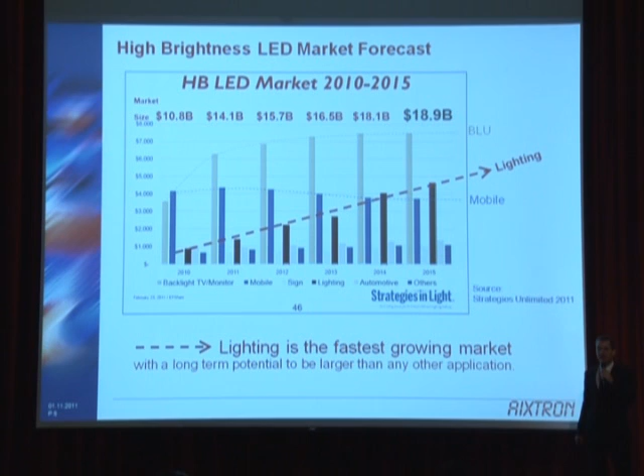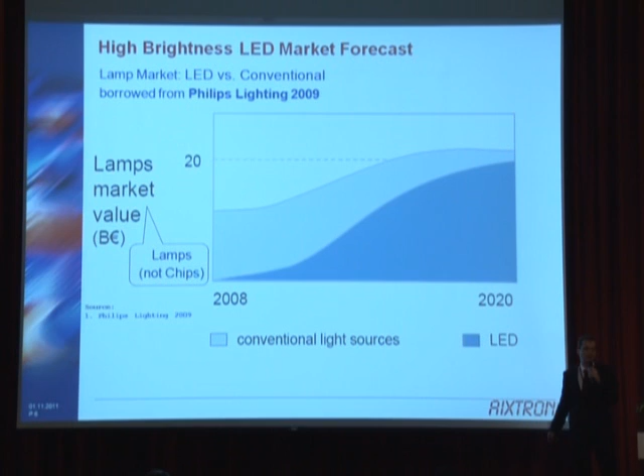And how big that is, I've borrowed another slide. This was published by Philips Lighting back in 2009 already, and it shows the lamps market over time, and we can see that it's predicted by 2020 maybe around 90% by revenue will be accounted for by LED lighting. So I said it is actually a lamp market, but since these lamps will be fed with LED chips, it is reasonable to assume that the LED chip market will grow with the LED lamp market fairly parallel.

So I'm going to superimpose the previous diagram or data onto this one, and we can see it's fairly consistent how the markets grow, and we expect that by 2020 the lighting market, LED chip lighting market, will be about 14 times bigger than in 2010. Now, something needs to happen for this to come true, and that is the costs need to go down.

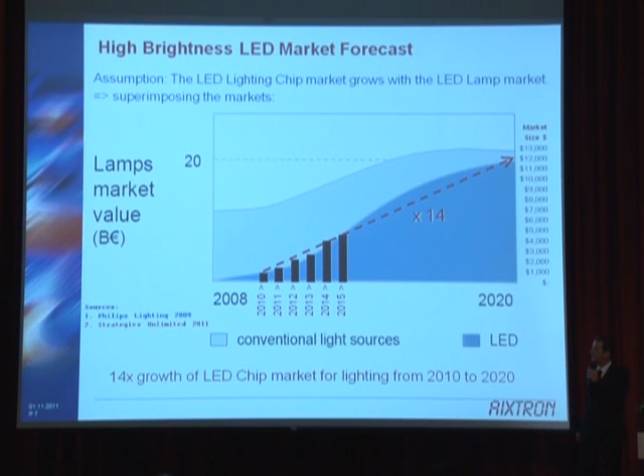For this view, I'm going to show you my third and last borrowed slide. This one comes from the US Department of Energy, and it's a roadmap on how the cost should come down from 2010 to 2020, same period. It is predicted the cost will go down to about 1/12. And the epitaxy part, which is this block in this cost, should be going down to about 1/8. This is where we need to be helping our customers, the LED chip manufacturers.

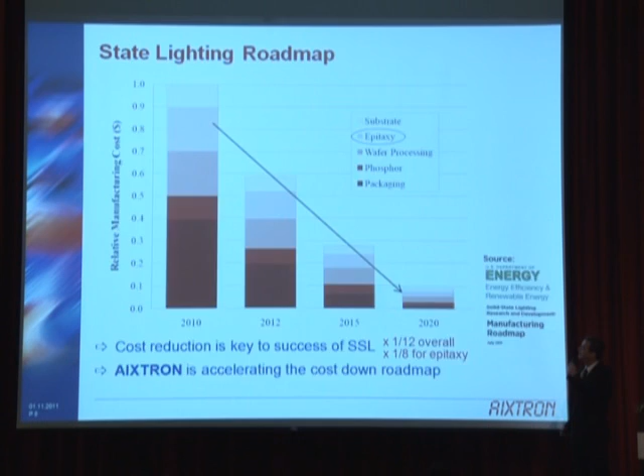Now we take a look at the cost breakdown of an LED epi wafer, and we have here the capital cost, the chemical cost, the consumable cost, and those together are basically the reactor-dependent costs, and they make up about 90% of the cost of an epi wafer. The rest is labor and fab, that's about 10%, and that is more related to the platform.

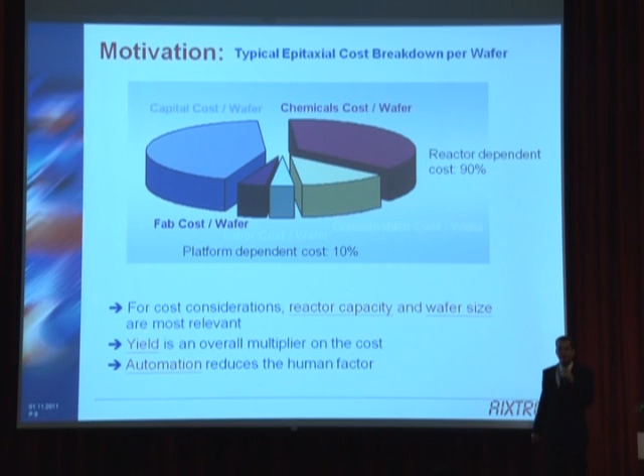So if you want to address these reactor-dependent costs, the most relevant part is actually the reactor capacity and the wafer size. Yield is another important subject because it's a multiplier onto the whole cost of ownership. And finally, automation, even though it only addresses the 10% here, it is important because it takes out the human factor in the production. So these three subjects, reactor capacity and wafer size, yield and automation, are now the subjects for the technical part of my presentation.

Over the years, the reactors that us and our competitors have offered and delivered to customers have become bigger. We can see here 6x2, 11x2, 24, 42, 56, and even 69 2-inch wafer capacities per reactor. But not only have the reactors gotten bigger, they're also geared for larger and larger wafer sizes.

So actually, when originally the reactors were designed for 2-inch wafers, back in 2003 we already offered a 4-inch wafer capable reactor, which at the time was operated with 2-inch wafers in these pockets, but now most of those reactors have been retrofitted to hold 8 4-inch wafers. In 2006, we already offered a 6-inch system. At the time, nobody was using 6-inch. Today, it's coming.

Today, some customers are starting to use 6-inch wafers. And the latest product is actually already capable of holding 8-inch wafers. So it's always one step ahead.

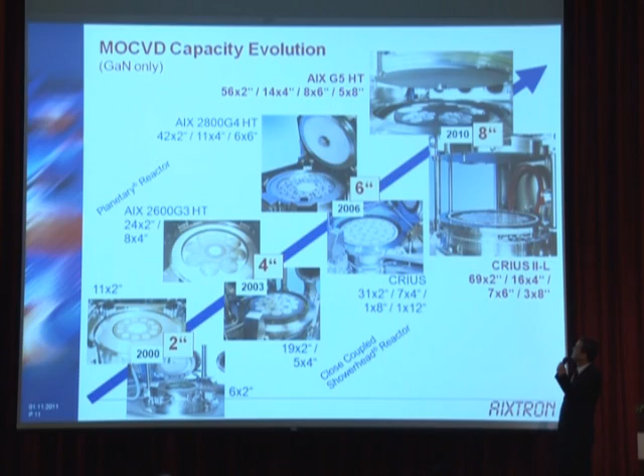Let me show you some pictures of the reactors. For example, here we see the CRIUS II-L showerhead reactor. It can hold 69 2-inch wafers or 16 by 4-inch, and also 7 by 6-inch or 3 by 8-inch. The other platform, the planetary reactor, we can see here 56 by 2-inch and also 8 times 6-inch, and this is a nice example on this reactor—it's actually the same reactor for 2 and 6-inch. All you need to do is exchange these satellites to hold different wafers.

I think you call them Panzer, right? Okay, here we see 11 by 4-inch and already 5 times 8-inch today in use for non-LED applications, mainly for gallium nitride and silicon electronic devices.

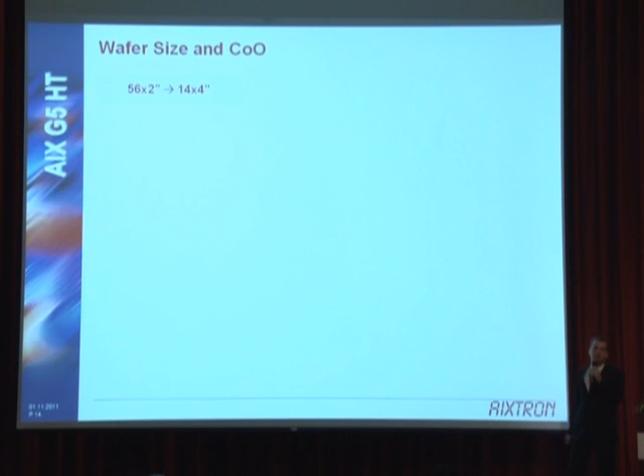Now what is the advantage of larger wafers? It may seem obvious—the silicon industry is using larger and larger wafers for obvious reasons, but let me share a view with you anyway. I want to show you the impact of larger wafers on the cost of ownership. As a start, I'm going to show you moving from 56 times 2-inch to 14 by 4-inch planetary reactor. So the capacity of the reactor is number of wafers times pi r squared.

Very simple. If you do the math here for 56 times 2-inch and for 14 by 4-inch, you can see that the area ratio is exactly the same. So the two configurations have the same capacity.

However, every wafer has an edge, a wafer edge that cannot be used. So we should actually be subtracting this wafer edge from the radius. If we do so and compare the capacities again, we see that the 4-inch configuration already has a 14% capacity advantage over the 2-inch. And if the system cost is exactly the same, you have a larger capacity by 14%. So obviously the costs go down to about 88%.

In the running cost, you need the same consumables, the same amount of chemicals, so the running cost also goes down to about 88%. For the chip process, I'm making a very simple assumption because I'm an epi guy, not a chip process guy. So I'm just assuming it takes about 50% longer to process a 4-inch wafer compared to a 2-inch wafer. So I have the area of a 4-inch wafer with a 50% drawback compared to the area of a 2-inch wafer, and we can see we have a 2.7 times higher throughput just by moving to 4-inch.

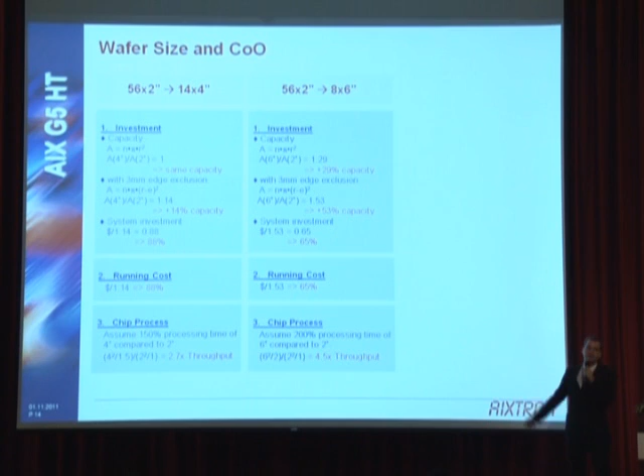So we already get a 30% advantage, and if we include the edge exclusion of 3 millimeters, then we're already at a 50% advantage. That directly translates into investment, which goes down to 65%. Same thing for the running costs, down to 65%. For the chip process, I'm making a similar assumption: it takes 2 times as long to process a 6-inch wafer compared to 2-inch. With a larger area, twice as long, we have 4.5 times the throughput.

So one last example here is looking at this for 8-inch. We have a capacity advantage moving to 8-inch already of 43% in this reactor. If we take edge exclusion into account, it's a 74% advantage. So the cost goes down to about 58%, also the cost of consumables. And for the chip process, if it takes 2.5 times longer to process an 8-inch wafer, we still have a throughput advantage of 6.4 times.

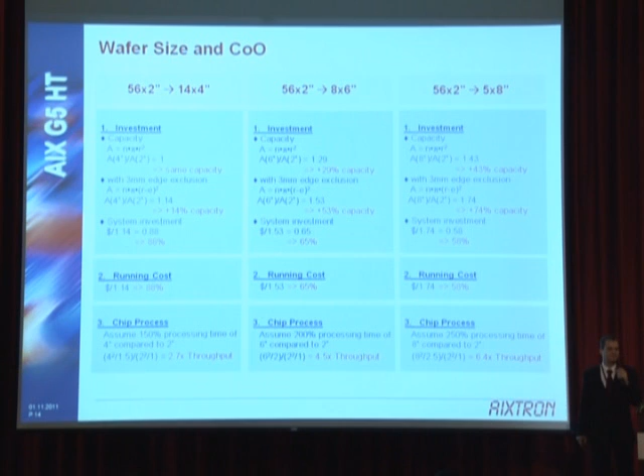So, very clear advantage of larger wafers.

For the next subject, let me talk about yield, and I'm going to show you a few examples. This is the 69 by 2-inch configuration, the showerhead system, CRIUS II-L showerhead system.

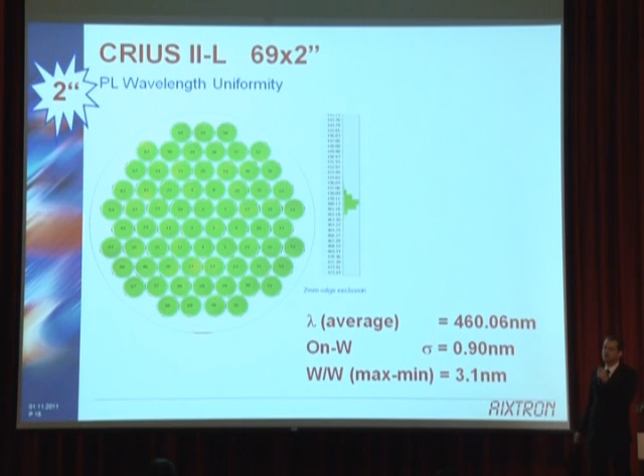At 460 nanometer wavelength, we have an on-wafer standard deviation below 1 nanometer and a wafer-to-wafer distribution max-min of about 3 nanometers. For 4-inch, we have 16 4-inch wafers in here, similar wavelength, on-wafer a little bit more than 1 nanometer, and wafer-to-wafer actually even less, about 2 nanometers max-min.

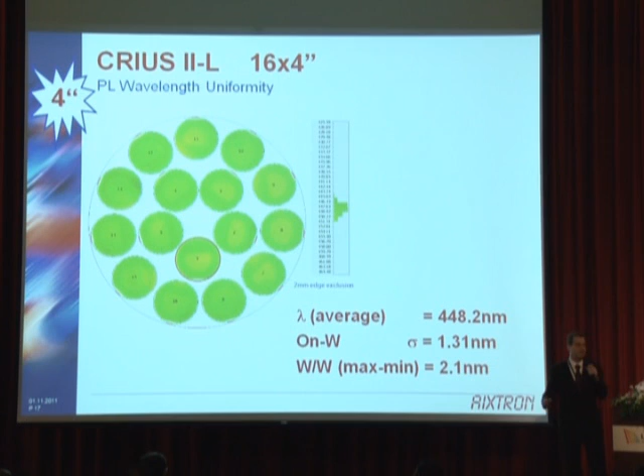But why am I showing you this? Well, because it goes into yield. The distribution of the chip wavelengths is basically a convolution of the on-wafer and wafer-to-wafer distributions, and it's a fairly Gaussian type curve, and the yield will be determined when we define the bin size. So once we define the bin, we can see how many of those chips are usable and how many are not. The yield depends very much on how narrow this curve is and how wide the bin is.

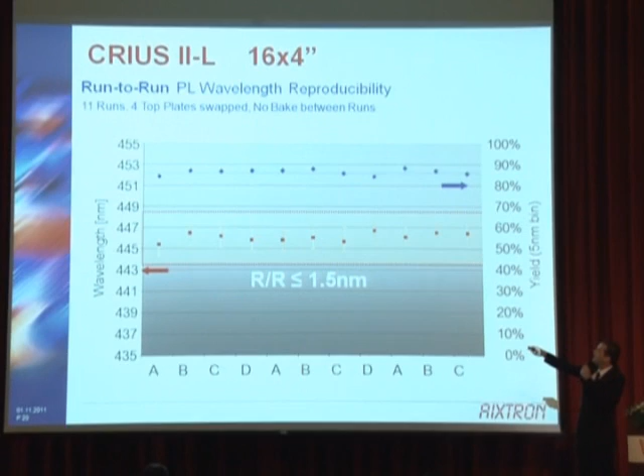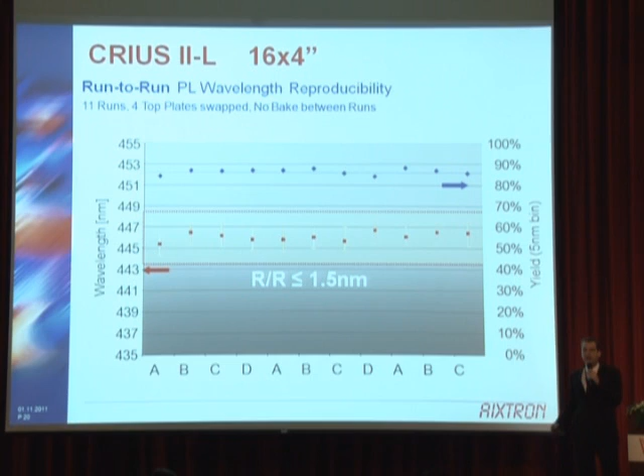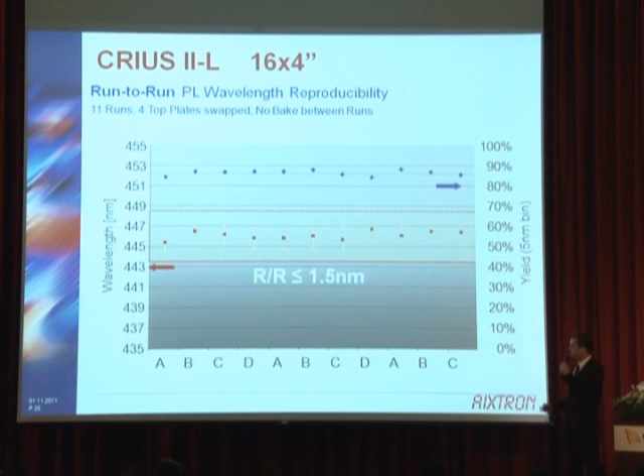If we look at several consecutive runs here, we can see the yield of each run is below 90%. Why is that, when I just showed you more than 90%? This is because every run to run there can be a small deviation in the wavelength, or the center of gravity shifts. Some manufacturers call it the hit rate. If this curve is shifted a little bit while the bin window stays the same, we gain some chips here but lose more here, and the yield goes down.

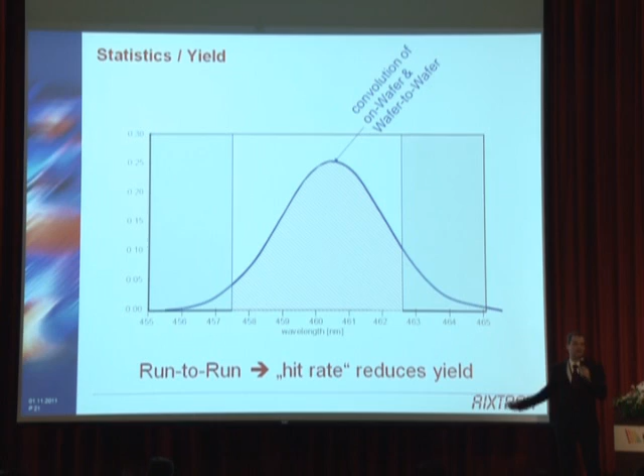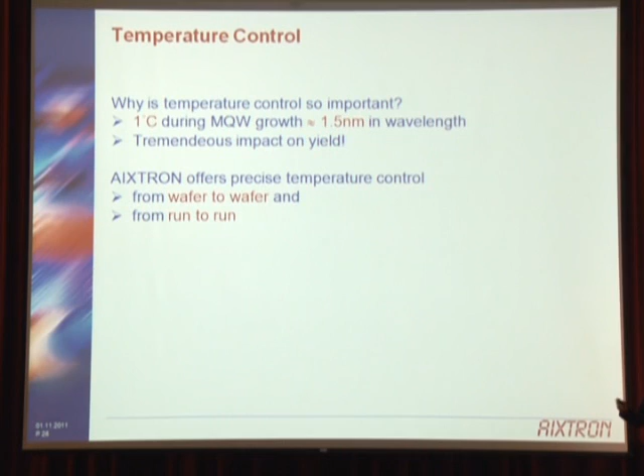So now I'd like to show you how we address this issue, and it is basically done with temperature control. Why temperature? Well, the temperature is so important because only 1 degree centigrade makes a difference of about 1.5 or even 2 nanometers in the wavelength. To control the wavelength precisely within the run and run to run, we need to pay special attention to the temperature.

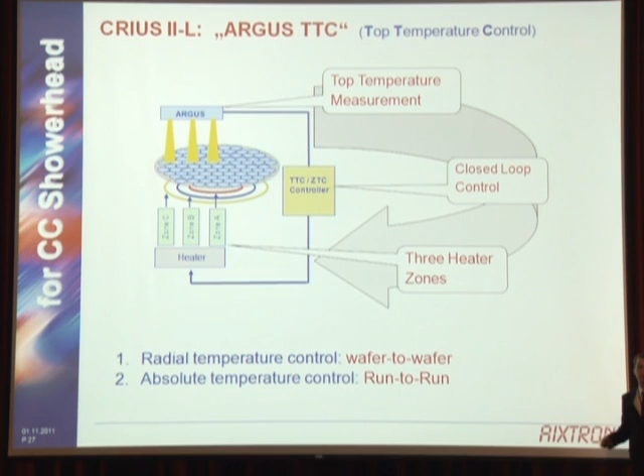So what we're doing here in the shower head system is measuring the temperature of the surface and feeding this back into the heater, which controls the radial distribution over the susceptor, and also controls the temperature from run to run. Here we can see a temperature mapping of the whole susceptor, about 1.3 degrees temperature distribution. Remember, about 1.5 nanometers per degree, that translates into 2.1 nanometer distribution. This is actually the data I showed you a few slides ago. So it helps a lot in controlling the yield.

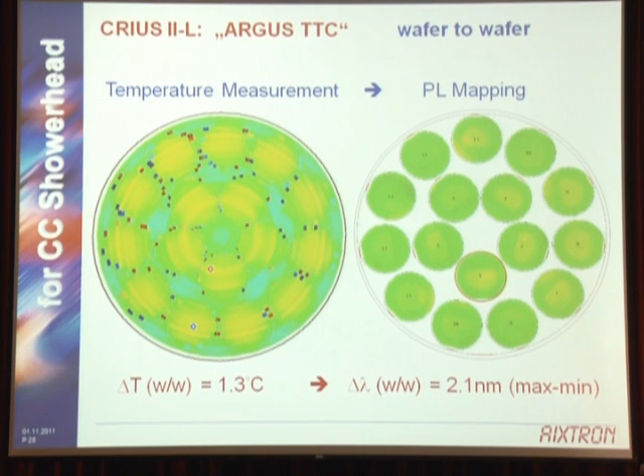Now, run to run, we can let the system adjust the wavelength automatically. If we look at the run to run data, we can see we are very close to 90% yield, always high, because run to run we have about 0.2 degrees centigrade variation, which translates into about 0.2 nanometers.

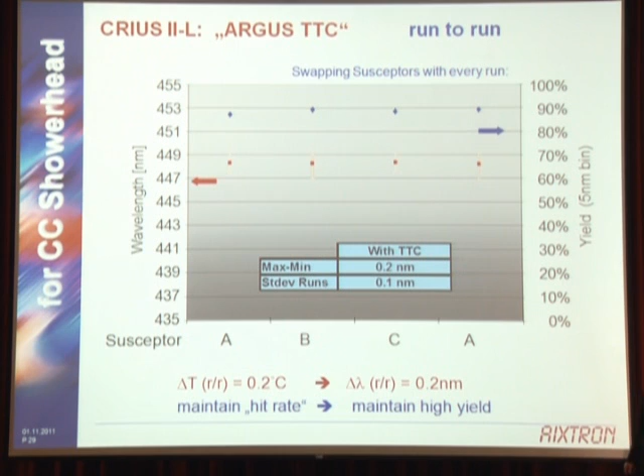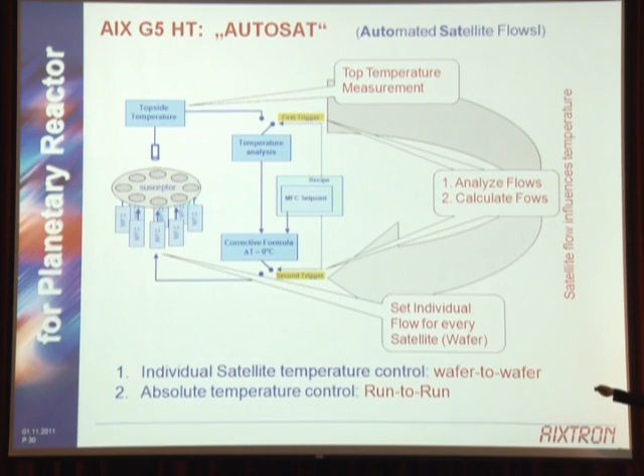We can see here, without temperature control, we have a variation. Each point represents one 4-inch wafer. We have a variation of about plus minus 3 nanometers, or 3.7 degrees centigrade, which translates into plus minus 3.3 nanometers. If we let the system control the temperature, it goes down to almost 0, with a wafer-to-wafer variation of plus minus 0.25 nanometers.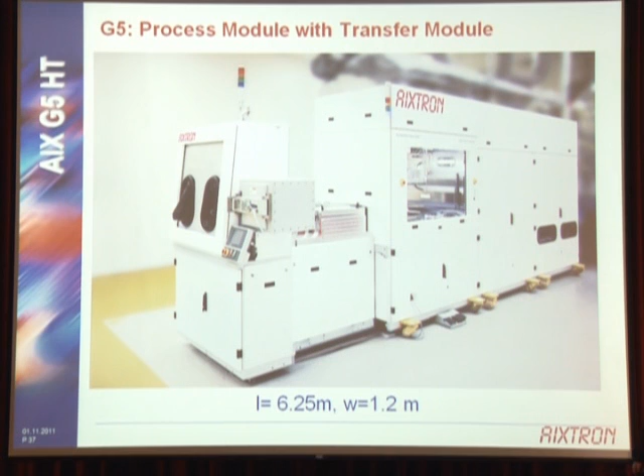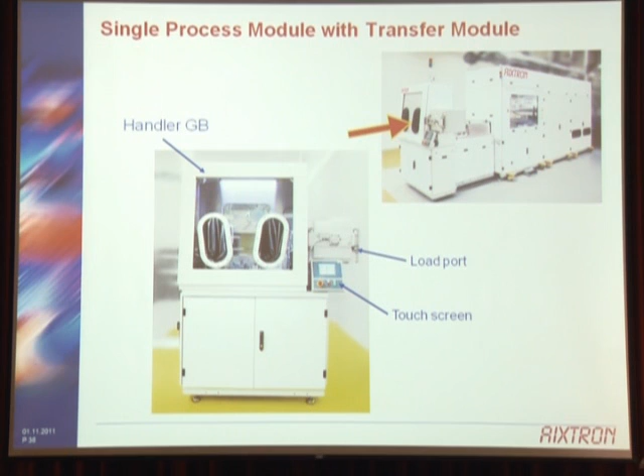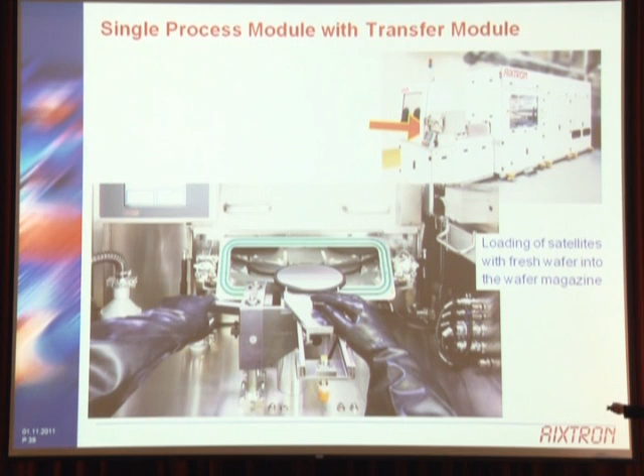First, we look at the operator interface. We see it's still a glove box and a load port, with a touch screen to operate this front end. Now we look inside this user interface, and we can see the wafer is put on the satellite, then we slide the satellite into a so-called magazine, that's where we keep the satellites and wafers, and that's where they're picked up by the handler.

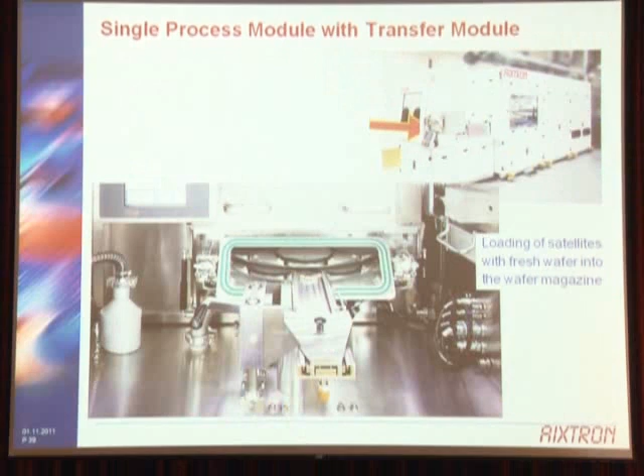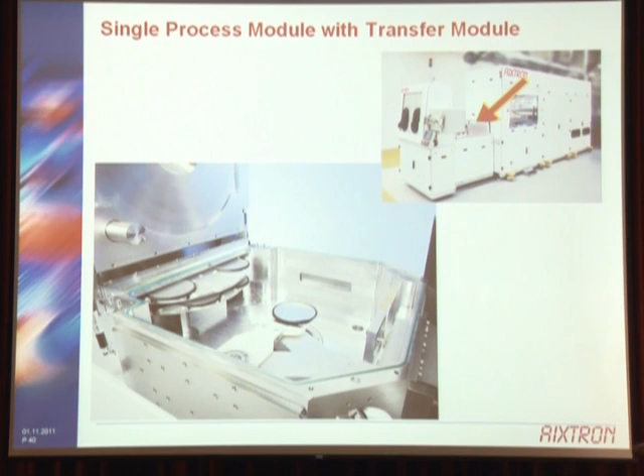In the next picture, we look into the transfer module, and we can see how the robot picks up the wafer and satellite and puts it into the reactor. Now we look into the reactor, and we can see how the robot brings the wafer in and puts it down.